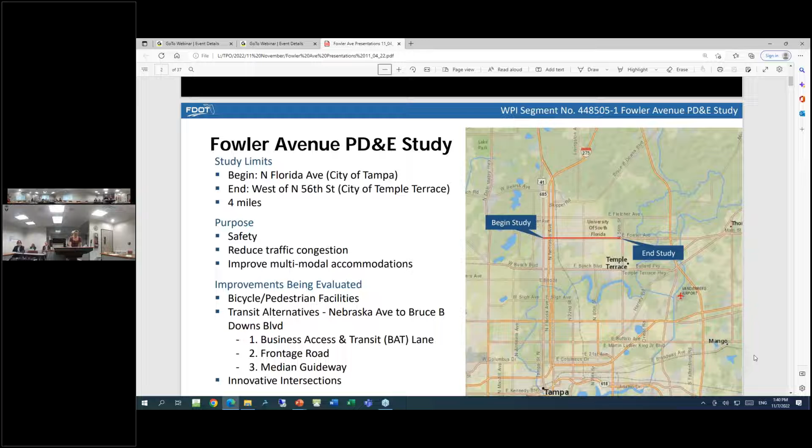All of these studies will provide the framework for improvements along Fowler Avenue. With the redevelopment of the University Mall area and the USF football stadium, we can all agree that Fowler Avenue is in need of improvements to address safety for all of its users.

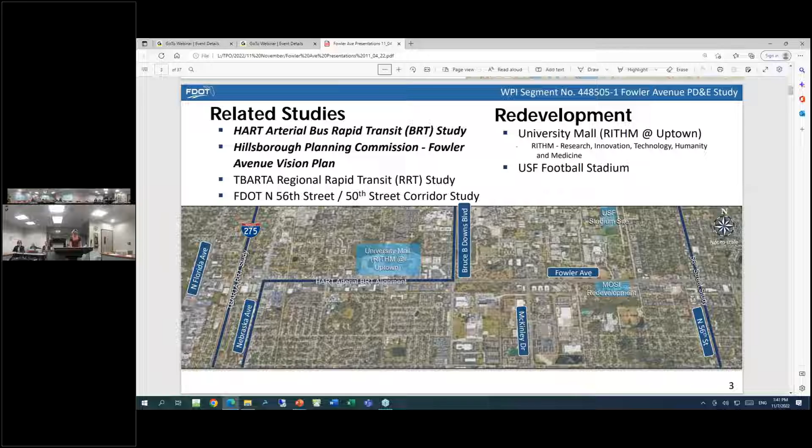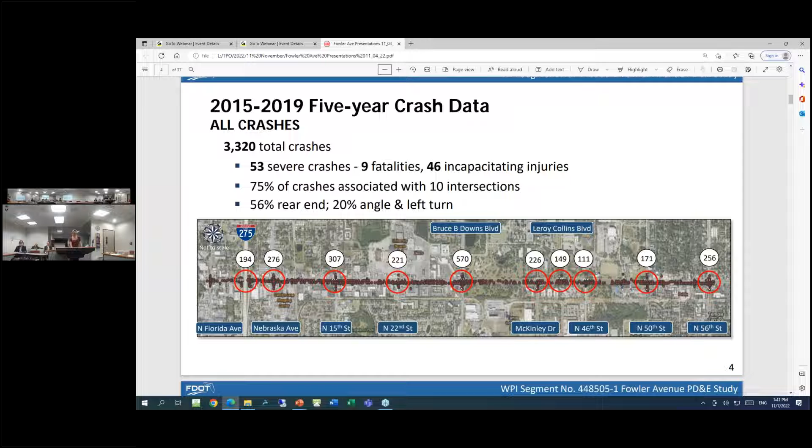I also want to mention the segment of Fowler from Nebraska Avenue to North 52nd Street is listed on the City of Tampa's high injury network.

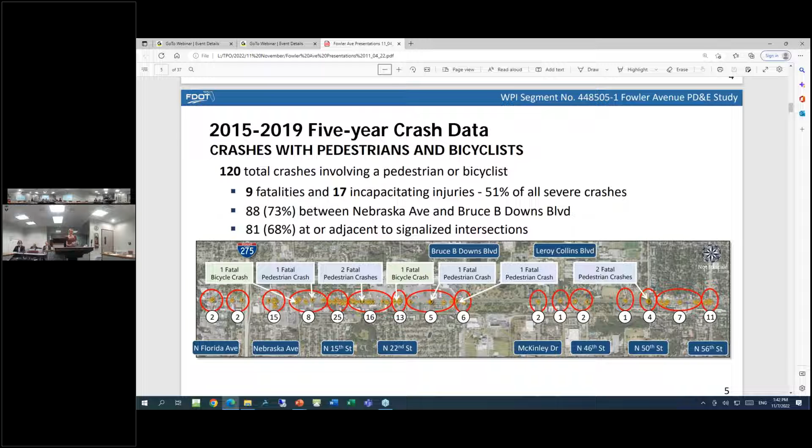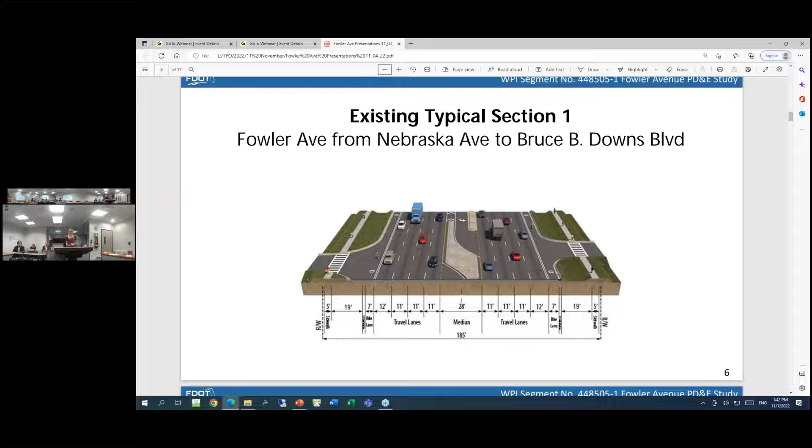Here we have our first existing typical section, which runs from Nebraska Avenue to Bruce B. Downs Boulevard. Today Fowler is a 6-lane divided roadway with numerous median left turn lanes. We have 7-foot bike lanes located adjacent to the travel lanes and sidewalks on both sides of Fowler, and the existing right-of-way width totals 185 feet.

The second typical section is in the eastern segment of the project, from Bruce B. Downs Boulevard to west of North 56th Street. This is a 6-lane divided roadway where the 7-foot bike lanes and 5-foot sidewalks continue, and the existing right-of-way width totals 230 feet.

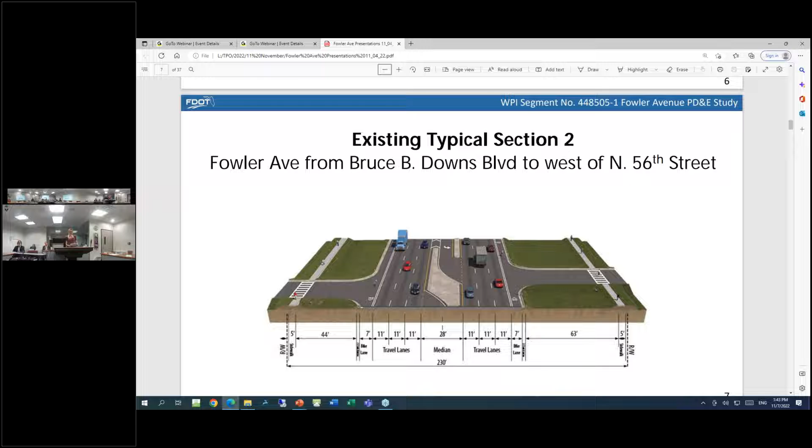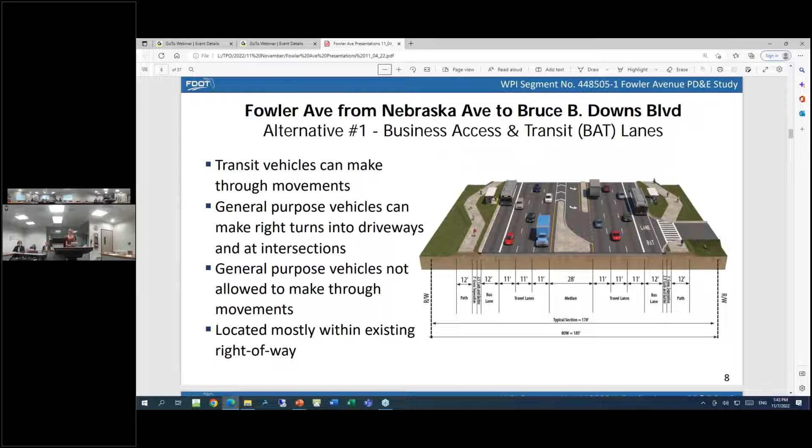Now let's look at the 3 alternatives for the transit corridor from Nebraska Avenue to Bruce B. Downs Boulevard. Alternative 1 includes repurposing the existing outside lanes as BAT lanes for business access and transit, meaning they would be marked for bus use and for vehicles making a right turn into a business or side street. This alternative also includes 12-foot shared use paths along both sides of Fowler, and based on preliminary analysis, minimal right-of-way acquisition may be required.

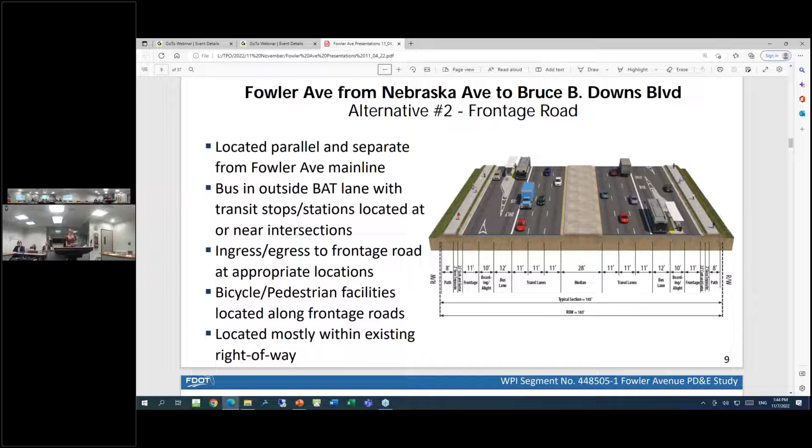The second alternative is the frontage road concept. The frontage lanes would be located parallel to and separate from the main line Fowler Avenue. They would be utilized by non-transit vehicles and provide access to local businesses. Vehicles on the main line can access the frontage lanes via slip ramps and vice versa. Transit vehicles would utilize the outside BAT lanes on the main line. Shared use paths or wider sidewalks would be located adjacent to the frontage lanes, and minimal right-of-way acquisition may be required for this one as well.

Our third and final alternative includes a median guideway for transit vehicles only. Stops would be located near intersections and crosswalks to allow for safer pedestrian access. Non-transit vehicles would be permitted to make turns at designated intersections and locations. This concept also includes shared use paths on both sides, and based on preliminary analysis, minimal right-of-way acquisition may be required.

As previously mentioned, the design of Fowler Avenue has user safety first and foremost. Narrower travel lanes and other proven traffic calming strategies are being considered. To accommodate these measures, the speed limit on Fowler Avenue may be reduced.

Also, from Bruce B. Downs Boulevard to Bull Run Drive, innovative intersections will be studied. Additionally, pedestrian and bicycle facilities will be enhanced throughout the corridor.

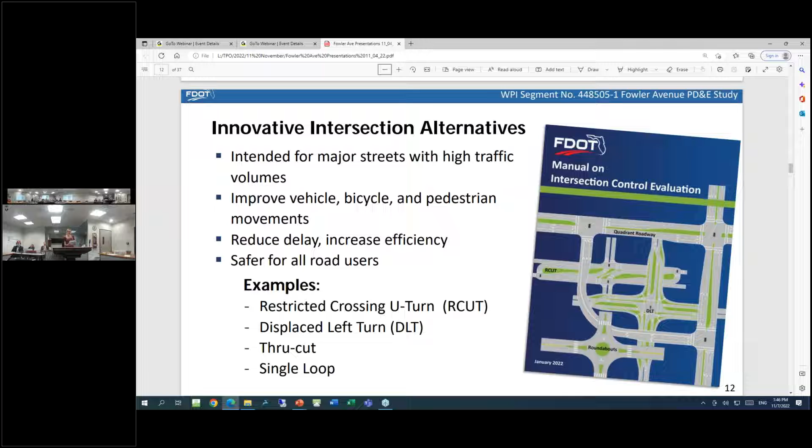Innovative intersections are intended for major streets with higher volumes of traffic, just like Fowler Avenue. They modify vehicle, pedestrian, and bicycle movements at conventional intersections to reduce delay, increase efficiency, and provide safer travel for all road users. The FDOT manual on intersection control evaluation will be utilized to determine the best possible intersection design. These include RCUTs, displaced left turns, through cuts, and single loops.

Public engagement is underway and will continue throughout the duration of the study. These study kickoff presentations will be given at the remaining TPO committee meetings and then to your board. The project kickoff newsletters in your packets were mailed to properties along the corridor and sent to stakeholders. Another newsletter will be sent to announce a future public meeting not yet scheduled.

The project website is active and will be updated continually through the study. Small group meetings will be held with interested community groups within and adjacent to the study area. Also, an alternatives public workshop will be held once the alternatives are evaluated. And a public hearing may be held if necessary based on the preferred alternative.

Here's a look at our schedule. As it shows, public involvement will occur throughout the study. Data collection is underway with alternatives development and evaluation to follow. The alternatives public workshop I mentioned before is anticipated for the second quarter of 2023. And then if necessary, a public hearing would be towards the end of next year, 2023.

For more information on the project, I put the study website on the slide, as well as my information, so feel free to contact me. And if the committee is ready, I will turn it over to Jesus for a HART study.

I have a couple. I think the project certainly has a lot of merit. I did have one question on your alternative 3. Can you bring that slide up where it shows a picture of alternative 3 with the center of transit? So that's suggesting that, are those stops in the middle? I guess my question would be, do you have any idea about how you would be moving, if there's supposed to be stops there, the pedestrians across the intersection, across the roads?

Yeah, so the stations or stops would be located preferably near intersections where there are crosswalks or at mid-block crossings. So it would be as safe as possible to get the pedestrians from the sidewalk on the main line to the median stop. Okay. All right.

I mean, without knowing a whole lot about it, I would certainly have hesitations on that. Just the idea of introducing more people crossing very busy roadways would be a very large concern, if they weren't. So that was just my opinion that I think we're bringing to it, but I was curious about that.

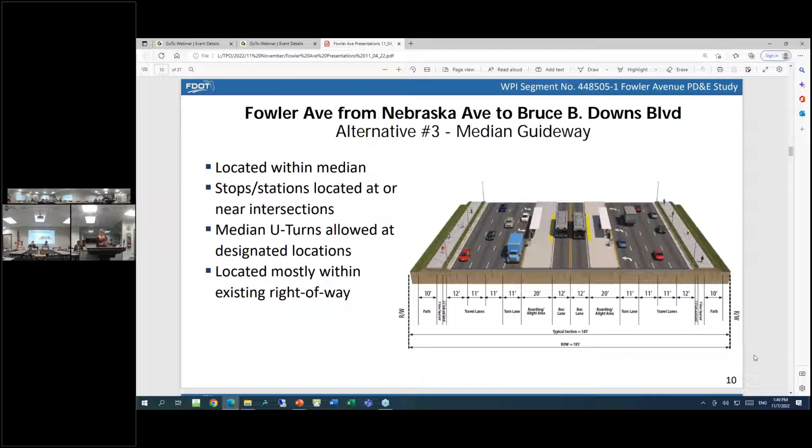The other thing, and this is just more of a comment, if you can bring back the slides that show the crashes on the intersections. Again, I don't regularly work with traffic. That's not what I do. So maybe this is very common for you all.

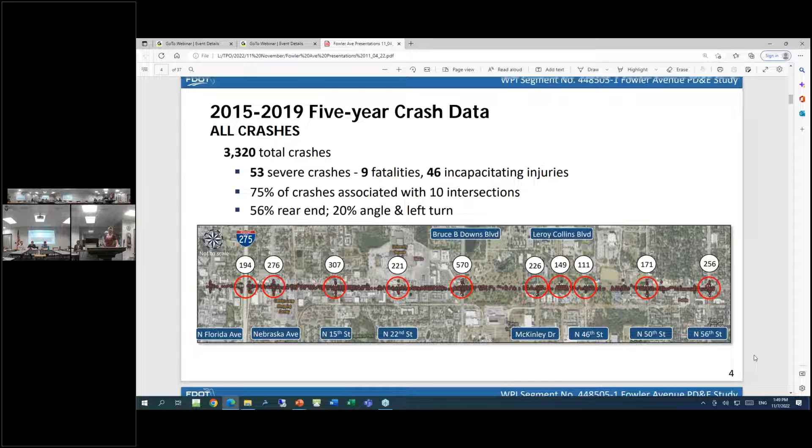But what jumped out at me is the number of crashes at 15th and Fowler for its size. I think that's a 2-lane road that may expand to 4 at the intersection. But this one and the following one with the fatalities or the pedestrian, it seems excessively high compared to all the other ones. So I guess one thing I'm just pointing it out for whatever everybody's benefit that they wanted to hear about it. But I guess when you talk about innovative intersections and so forth, I would minimally like to think that this was a really focused intersection based on the data. I'm sure it would have been, but I think I'm just kind of highlighting it.

Certainly, there's other ones of concern too. I mean, I'm not surprised Bruce B. Downs and Fowler is a large peak, but 15th, I just wouldn't have thought that. I think it's the amount of pedestrians that utilize that area is probably the reason. But so anyway, just bringing that up. If anybody had comments, feel free. But that was it for me.

One follow-up to the issue on 15th. That was in our original high injury network, Vision Zero.

It has a HART route on it that is one of the highest ADA used HART routes in the county, and I know the county has also just done some improvements on 15th.

Okay, very good. I'm glad to hear that's being addressed. That's part of what we're charged with here as a committee, to identify things and ask questions, and I'm glad to hear they're taking some measures. But as you look at future studies, I think that should be a focus area.

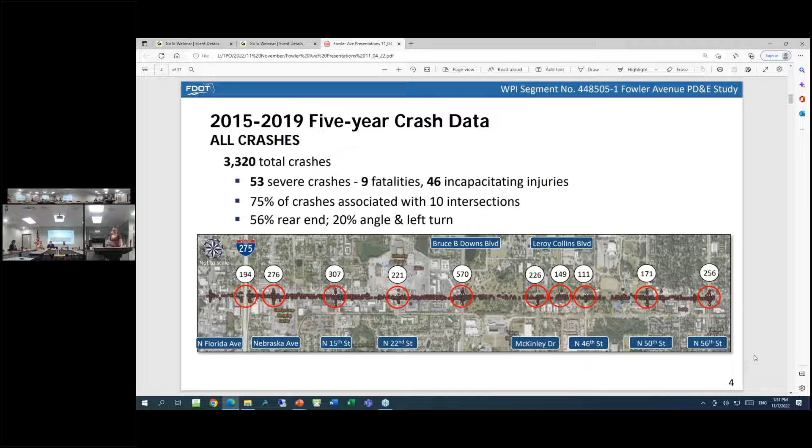Thank you. I don't feel like we have any other comments. Oh, I'm sorry, Sarah. Just looking more closely at the typicals, one thing that stood out to me in alternative 2 is you only have an 8-foot path, and that seems kind of narrow since that's going to be replacing the bike lane and the sidewalk. Just something to keep in mind.

Yes, I understand. These typical sections are very preliminary. We just executed the contract with the consultant, so we're going to be refining these. The reason there's 8-foot paths on our side right now is we were trying to see what we could do within the existing right of way. We're going to be working on that. Thank you.

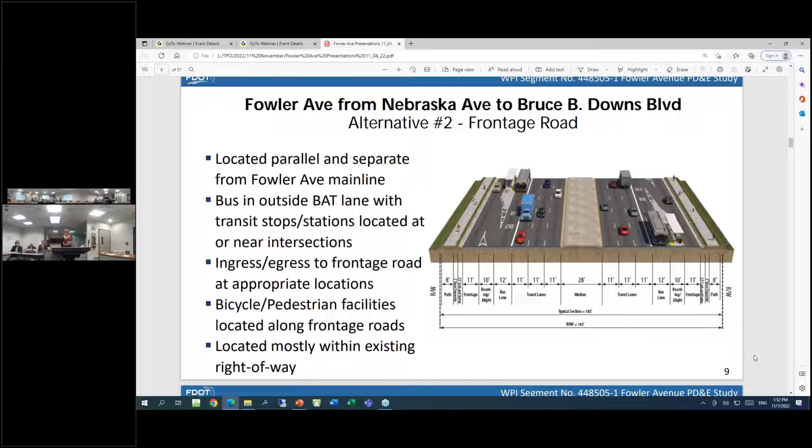Good afternoon, committee members and everybody else. My name is Jesus Barraza Garcia. I'm part of the planning staff with HART, and I'm here to give you an update on the arterial BRT study.

First, how did we get here and what has happened to date? The study started in the 2018-2019 timeframe as phase 1, and it resulted in a recommended alignment that was approved by the board in late 2020. In parallel, there's been the TOD pilot project going on, which is intended to recommend transit-oriented development strategies along the BRT corridor. That study is slated to wrap up sometime before the end of this year.

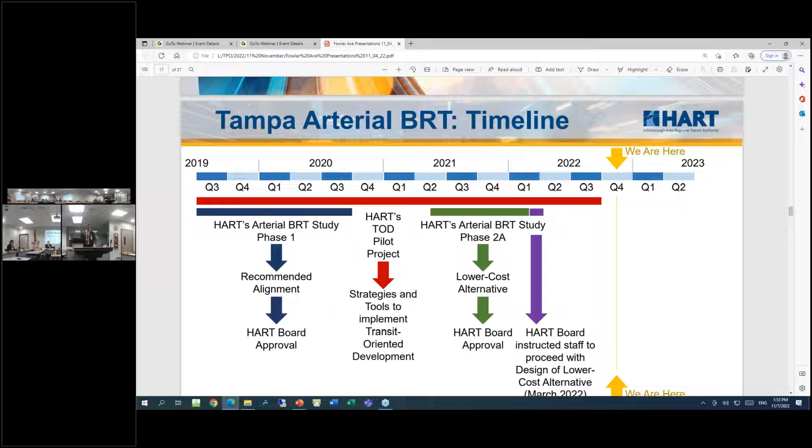After coming up with the recommended alternative, there were concerns about the high cost and the uncertainty of the transportation surtax. So phase 2A came to happen, and came up with a lower cost alternative, which was approved by the board earlier this year and moved on to design. I'm going to talk a bit more about the lower cost and recommended alternatives in a little bit. They mostly relate to how the bus interacts with traffic, but the alignment itself hasn't changed between one alternative and the other.

So this is an overview of the corridor. It's the Florida-Nebraska-Fowler corridor connecting downtown Tampa with the university area. HART's 3 busiest routes connect these 2 points, and 2 of those routes are the Florida and the Nebraska routes. So this is a prime corridor for BRT service.

It would also connect not just downtown and USF, but also Tampa Heights and Seminole Heights, which are important neighborhoods with lots of residents and jobs along there. The recommended alignment from phase 1 is the Linebaugh Avenue crossover to get from Florida to Nebraska up to Fowler.

If you get over too soon, you will be replicating the Nebraska route, which is already a Metro Rapid with some BRT-like enhancements, so we don't want to be duplicative of that. Also that way we serve most of the densest parts of Florida Avenue and avoid the car dealerships north of Linebaugh. Last I checked, cars don't take transit.

What does this look like for Fowler? So that's a close-up of Fowler. Station areas are subject to further studies, but preliminary stations would be at 15th Street, 22nd Street, and Bruce B. Downs. There's also a station at Nebraska and Fowler, but that will more than likely be on Nebraska, south of Fowler.

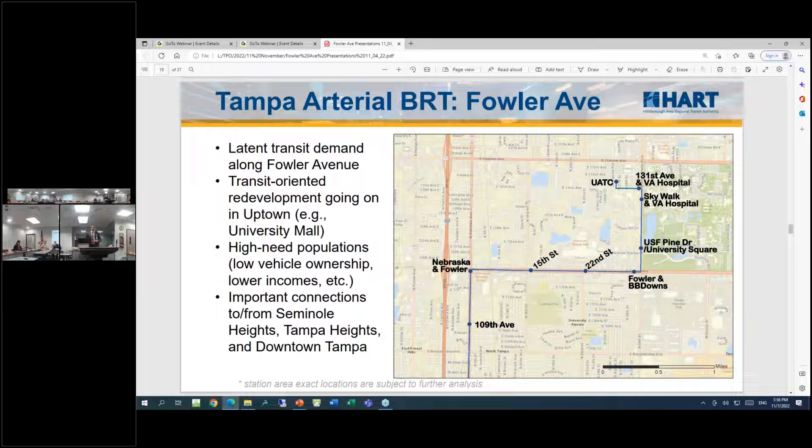There's also redevelopment going on in this portion of Fowler, the most notorious of which is University Mall. I understand there are others going on, but it's still in the works. At the street level is where you get to see the difference between the preferred or recommended alternative and the lower cost one.

First, I will caveat this by saying that this is the outcome of the BRT study. FDOT's PD&E will look further into this and refine the details of these alternatives and the other ones that Nam represented.

So you can see that preferred is the median running bus-only lanes, and the lower cost one is curbside running business access and transit lanes, so buses and cars would mix there. There's about a $40 million gap in terms of capital cost. Operating cost is pretty similar, slightly higher on the lower cost alternative because it takes longer since it has less preferential treatment for the bus. The longer the bus is running, the more labor, the more fuel you have to pay.

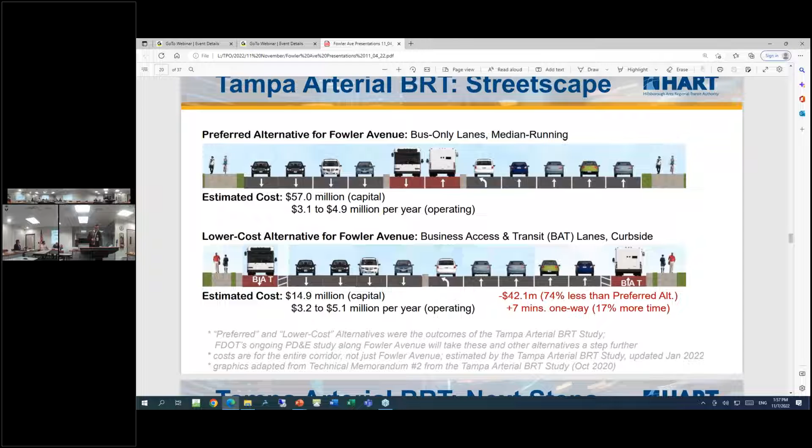So what's next for the arterial BRT study? We must complete the design, and then after that's done, we would move on to permitting, public engagement, and seeking funding matches from federal, state, and regional sources. And then construction would happen. There's no defined implementation timeframe because funding has not been identified for the entirety of the corridor. There are some pieces here and there - there's the PD&E going on Fowler, there's another study going on in the southern part of the corridor, the Tampa Heights area. But there's no funding to build the whole thing and to operate it at a higher frequency than today.

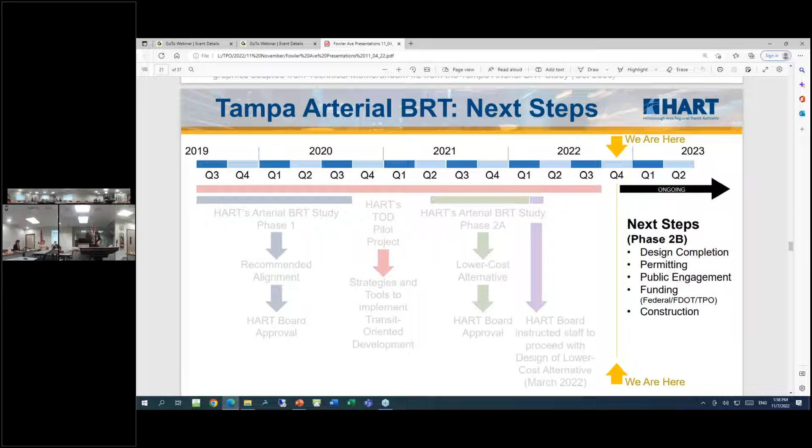Yeah, I think maybe, again, probably easier if we address questions while it's fresh in our minds here. So thank you for the presentation. Do we have any comments or questions from the committee?

Mike asked: the funding you mentioned, is that dependent on the referendum or is that independent funding? Yes, it depends on the referendum. I guess, is there a backup plan if it, for whatever reason, is not approved or passed? Or just we won't be able to do the project right now? Well, it wouldn't have as much preferential treatment as it would ideally have. We already have good service on Florida and Nebraska, but this would speed it up and make it more attractive for users. Okay, thank you.

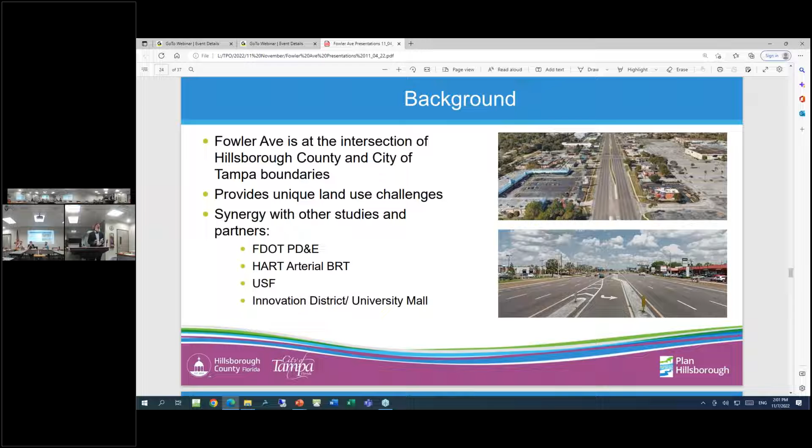So again, what is the purpose of the study? To develop a vision plan for Fowler Avenue corridor that enables equitable redevelopment. We'll talk a little bit about that. Equity is not just a catchphrase in this—it's something that has to be driven home in what we do here.

But what is a vision plan? If we go around the room right now and have a conversation about what is the vision for your family, everybody's going to come at it a little bit differently, but you're all going to have similar ideas of what you want. That's the same thing about having a vision plan for a community. It's asking them what they see for their community and how their families can be successful in that community, whether it's their economics, their education, allowing children access to play, or allowing the elderly and disabled access to goods and services they may not see today.

And achieve an integrated land use and transportation vision. The land use we talked a little bit about, and that sets it up with the transportation. But part of what we're looking for here as an actual deliverable on the scope are some policies that would be adopted into both of the comprehensive plans for the city of Tampa and unincorporated Hillsborough County, that deal with how we tackle those two different land uses and development patterns in the county and the city along Fowler Avenue.

And then develop a clear and consistent redevelopment strategy. So basically, my three deliverables are: one, the bread and butter—what are the existing conditions on the road today, land use wise? Two, what is my vision plan—what do we all see happening in this area, policy wise, in the future, and how can we articulate that in a vision? And then three, what are my redevelopment strategies to actually see those visions become a reality?

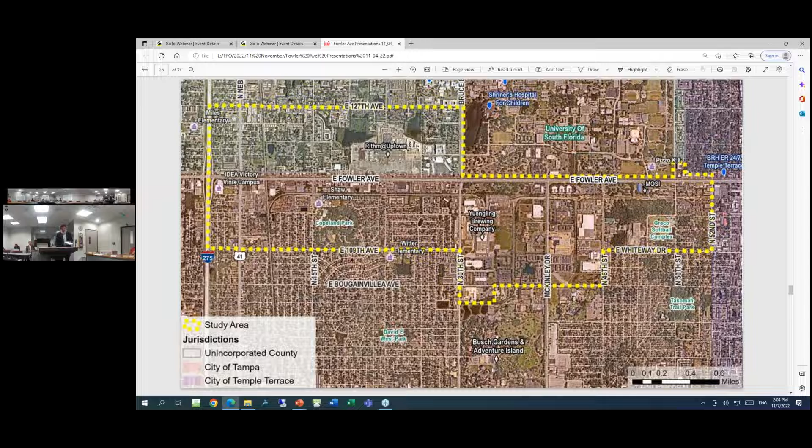So a little bit about those demographics: just over 15,000 people, 6,000 households, 25% don't have a vehicle. Again, there's a lot of employment here, but there's a lot of people without vehicles—that's what they always talk to me about as a land use planner. One of the things we always go after to actually improve transit along anything is, can we demonstrate to the Federal Transit Administration that the infrastructure, the investment that's about to be put in this area, is necessary and deems appropriate. So that's another one of those conversations right there.

But the employment and the population is an interesting thing. We talk about how many employees to how many people—well, the county basically has about 50 employees to every 100 people. In this area, we've got about 75 employees to every 100 people here. If I go south of the Alafia River, way down in South County, that's only 20 employees to every 100 people. If I go to Wimauma, you're dipping all the way down to 13. So you can see there's a concentration of employment here, but with that concentration of employment, we don't see benefits actually occurring to the people who live there.

You can see that household's at about 30,000, where you can see what's going on in the metro area, in the county, or in the city. So that does take back into issues about equity, making sure that folks in this area have equal access to reach places of employment. If 25% of people don't have access to a car, does that dip into issues of ADA, where they don't have access to make it to places of employment along Fowler Avenue because maybe the sidewalk stops, and we don't have a way for them to get to certain areas? There are other issues we can capture in a vision on educational attainment and other things, but it's not specifically the place of this plan to account for those issues, though it's something we want to capture from the community through education and training.

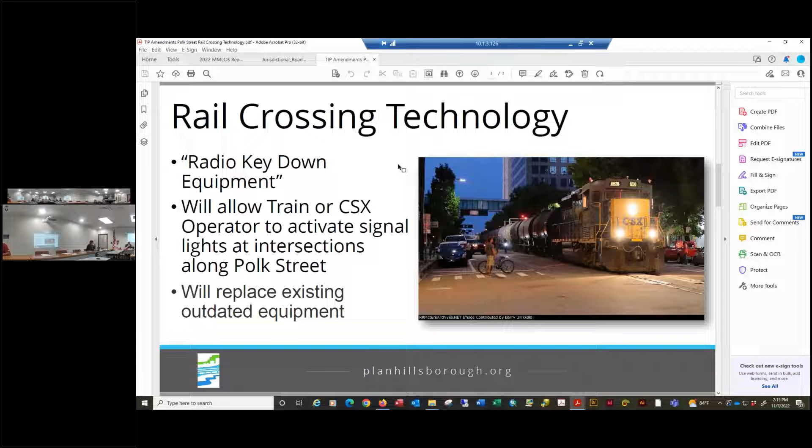And as part of the newly adopted public participation plan amendment, we posted an issue of the newsletter release on social media. We published a web page and posted signs along Polk Street intersections along the rail corridor. And that is all I have, quick and sweet.

And we're recommending the amendment to the fiscal year 23-27 TIP and recommending approval to the TPO board. Any questions for you guys?

Okay, thanks, Roger. Do we have any questions from the committee? I have one, just because I'm not that familiar with this. I'm familiar with this rail crossing, but I don't know how much rail car traffic it gets, and I don't recall what the current layout is as far as lights or barriers. Is this going to be just an addition of lighting, or is there also going to be pedestrian stops that come down, or what exactly is the radio key down?

Okay, so the radio key down—when a train approaches a rail crossing intersection, the older equipment will trigger the arms to come down and the flashing lights to signal. Along Polk Street, there are no crossing arms that come down. When the train moves through that corridor, it has to be at a specific speed, and it will trigger the flashing signals. Apparently some of the signals are not flashing, so this new technology will replace those.

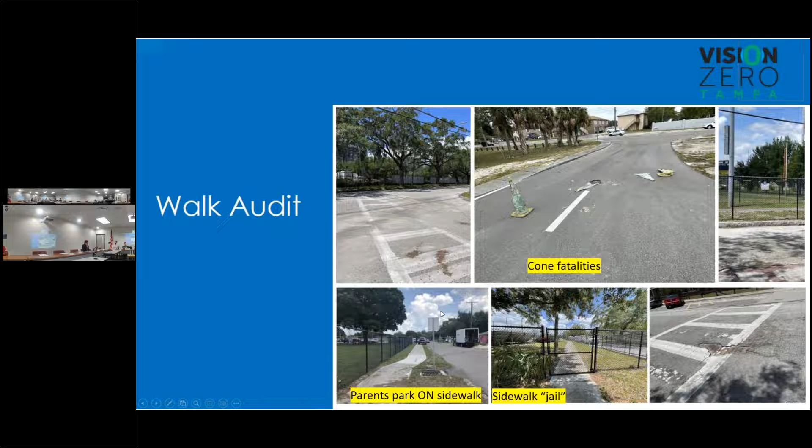That's one thing. I call this one sidewalk jail - it's over near Blake. Getting from Stewart over to Blake, you would have to go actually into the street at certain times of the day, so that seems like a missed opportunity. And then there are misbehaving parents who just say, 'I'm not going to deal with the car line or follow processes, I'm just going to park on the sidewalk.' Clearly that is a problem.

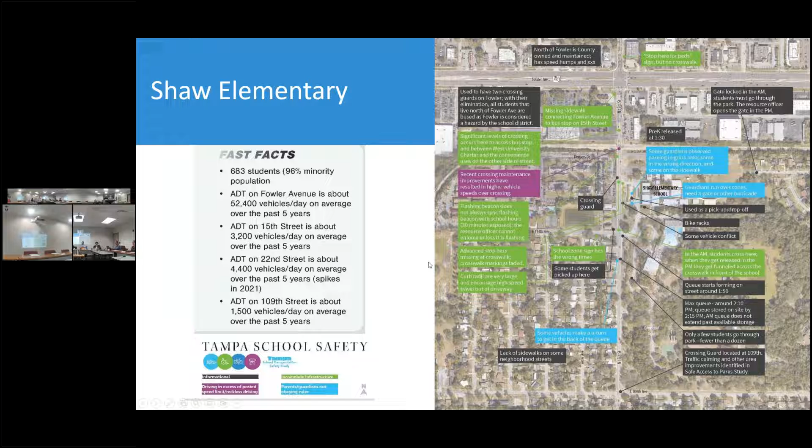We have our field analysis in each portion of the report, so each has a field review. We took all the individual survey responses for each school, then we got draft ideas and met and had a little charrette with each principal of the schools. We said, here's our professional and survey-informed ideas - you work with the school all the time. So we had a lot of really great interaction, and you can see the little Post-its and marking up the maps right in their offices.

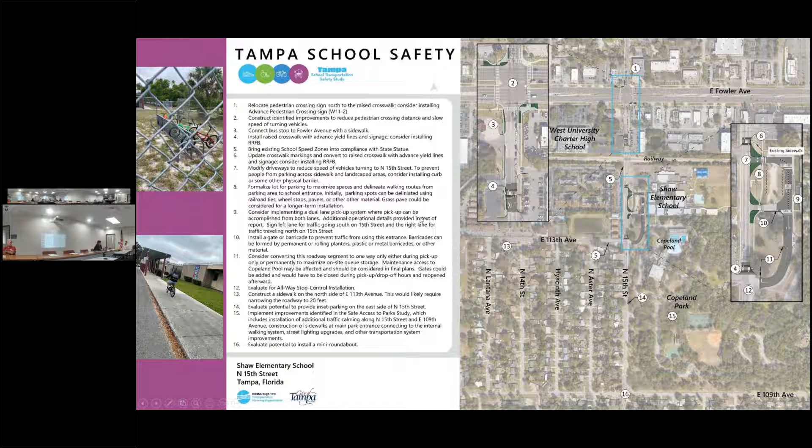We did those - I'm not going to go into all the recommendations this time around, but we developed formal recommendations and illustrated them for each map. These are again going to be posted on the website for your action in December. Orange Grove, same process.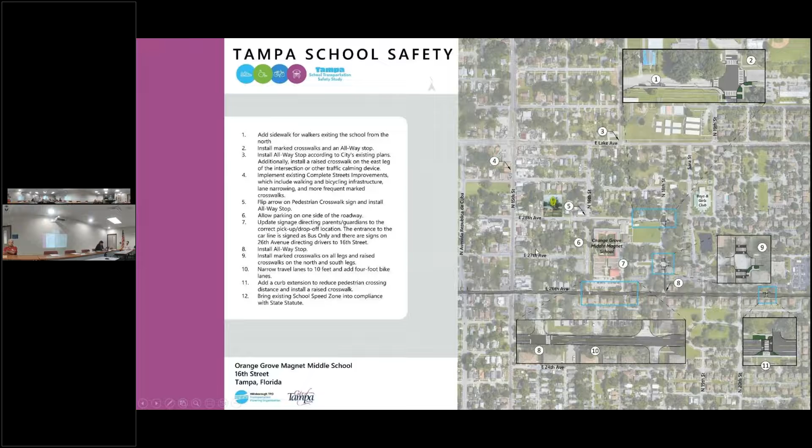Then West Tampa - this one's kind of fun because they've been informally doing what is called a school street. We know from our Vision Zero efforts about open streets or ciclovias. Well, there's a concept to do that where you close streets in and around schools to use for safe circulation for non-vehicles, and this school is doing that. So City of Tampa is going to work with us to make that a formal process and policy.

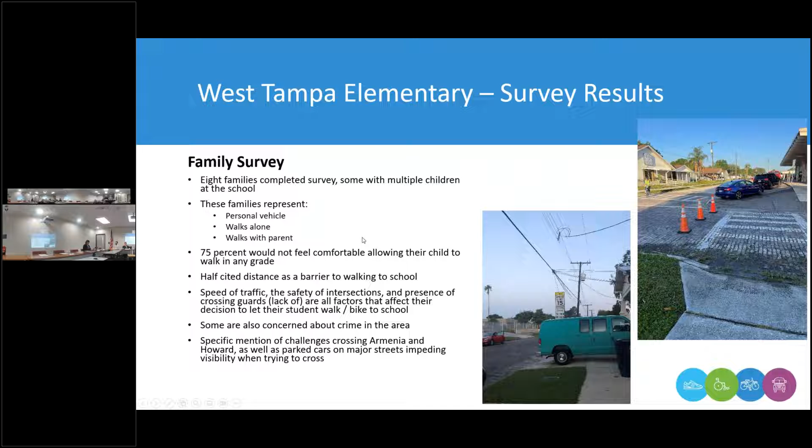Also, you see the cones. Having an official maintenance of traffic plan with the cone package and barricades, and where there are school streets or not school streets, is one tool we're going to file with each of the schools after the recommendations get formalized.

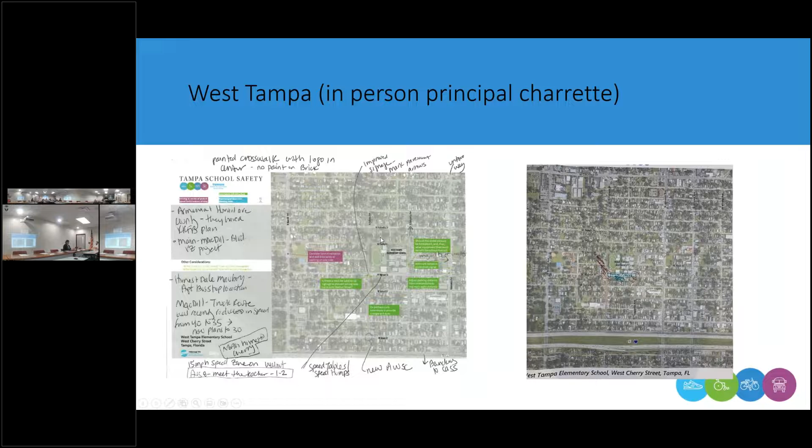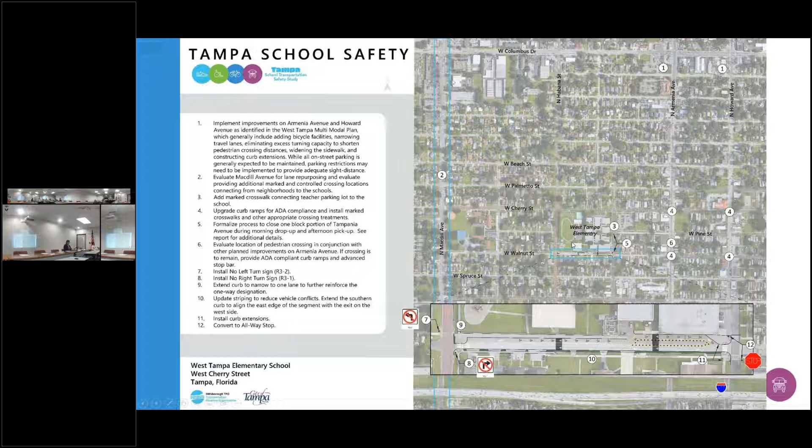Here's the observations and the principal feedback. The principal was very receptive to having a painted corridor, because there's some one-way and crazy driving on the one-ways where local residents are going the wrong way, and there's some speeding through the school zone because it's got extra pavement. So we're going to propose a Paint Saves Lives project for that lane, to make it more obvious where there's a special drop-off area. I'll tell you a little more about that fun project.

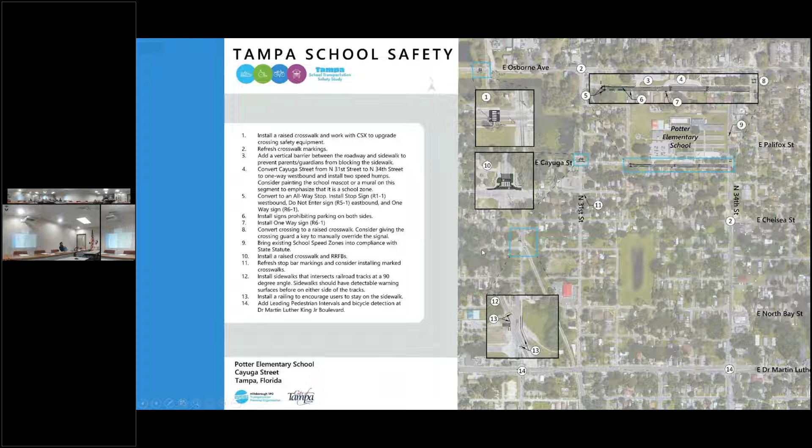And then at Potter, we got the family surveys, the principal recommendations, and then the formal recommendations like raised crosswalks, four-way stops, and additional speed management techniques.

Jefferson High School in the West Shore area - we've balanced these recommendations with city projects that are coming. We did that for each of the schools. Some of them are lucky enough to have complete street projects proposed in and around them, like Lois.

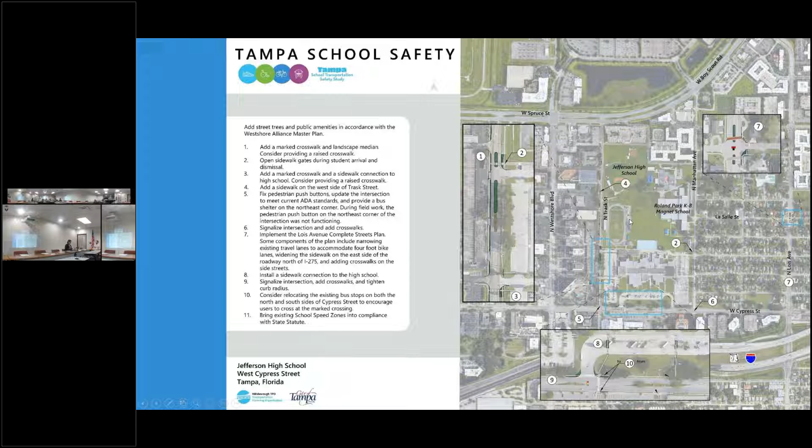Cypress is getting some attention. We're suggesting a traffic signal because the buses have a horrific time getting in and out on Cypress each day. So then we had this whole campus of Just Elementary, Stewart Middle Magnet, and then just down and under the underpass is Blake High School.

This was looked at comprehensively because they all influence each other and some of them get out at different times. This is where a school policy would also help us with all of our circulation issues, because Stewart is a magnet school.

We believe with all this redevelopment south of it, it could be a candidate for flipping back to a conventional neighborhood school, because you probably have a lot of children moving into all this residential that's going in, and that would not have this be attracting buses. Magnet schools are pretty much very bus focused.

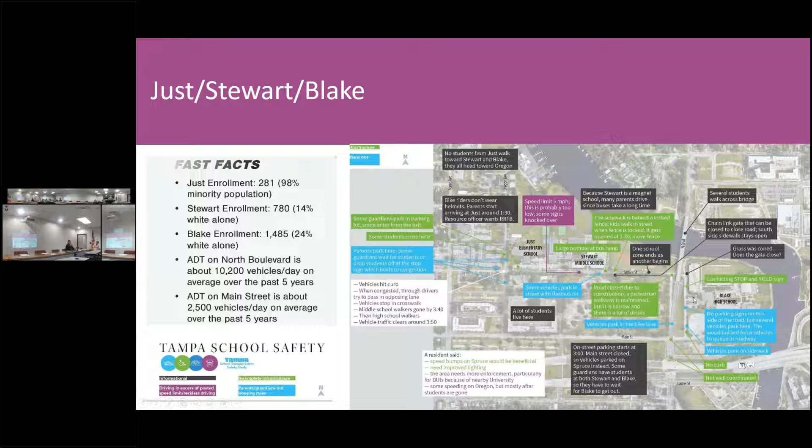We had all kinds of bizarre behavior in and around Blake High School, but the principal said, hey, we'll work with you on getting some of your encouragement and education policies out there. We have a drama department that will help make videos, etc. So yeah, and here we are.

Okay, and then the last fun portion of our study is encouraging and educational ideas. We have a list of resources, because there are some really great products out there. There are some great groups like Sidewalk Stompers that are doing very effective walk-to-school programs and safety ambassador programs. So they were a stakeholder and we're using their ideas and leveraging those.

So we're listing all these great resources that we have access to, so that they're like little flyers or magnets on their file cabinets in the schools, so that the administration feels comfortable about how to get things resolved for their school sites, on and off property.

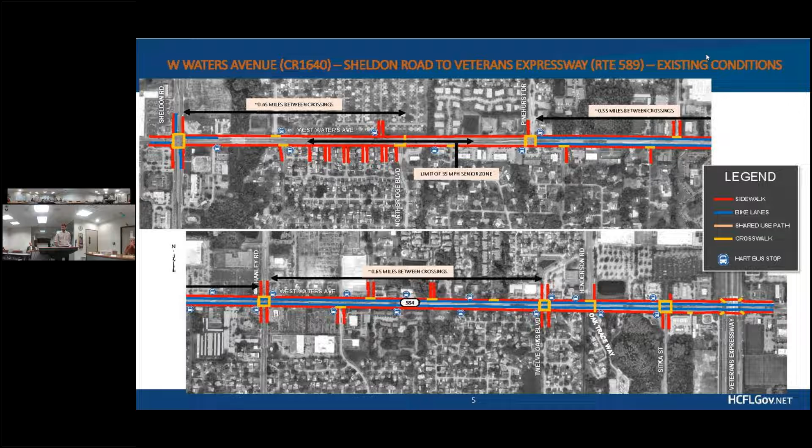This is just a commentary on the existing conditions. It is 35 miles per hour on the western end, 45 on the eastern end. And again, no mid-block crossings, numerous commercial driveways, and 2 HART bus routes on this segment.

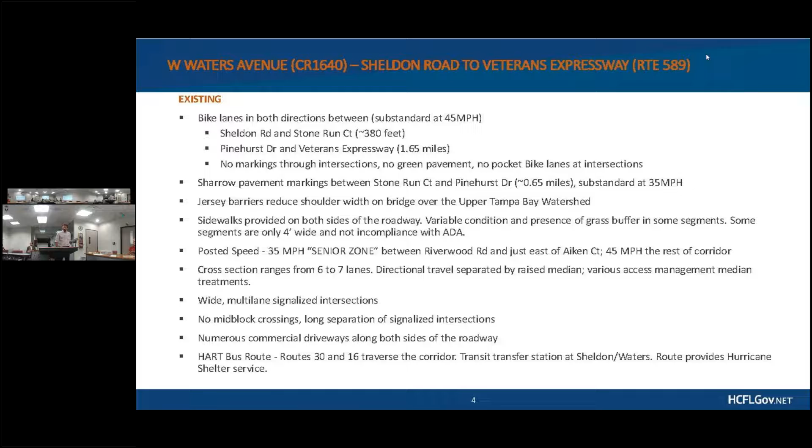So the potential improvements - we did try to use the county's tiered levels of interventions. Tier 1 is the lowest cost and quickest installation, while tier 3 is the highest cost, if I'm reading that correctly.

So a number of proposed or potential improvements that we will then go back and analyze and make sure that these would line up with the corridor.

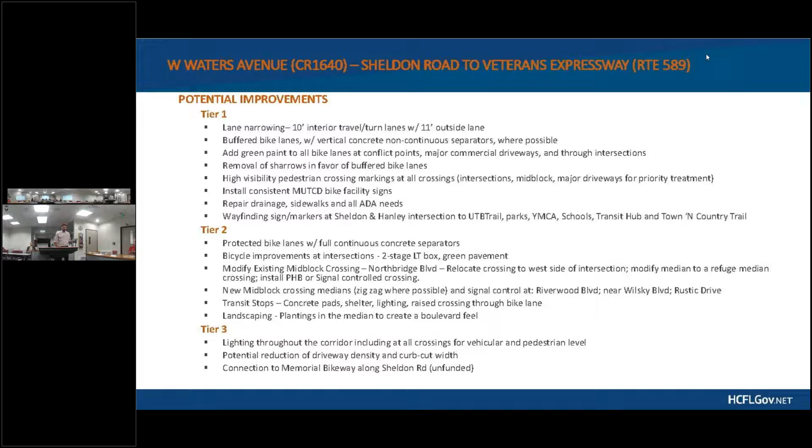Some of those potential improvements shown on the segments here include bike lanes potentially throughout the corridor, trying to extend those to Sheldon, intersection treatments such as bike boxes, signage, green paint marking at conflict points, and then mid-block crossing treatments at the locations proposed, which are Northbridge Boulevard and 2 other locations on that segment.

And showing these existing crosswalks parallel to marking the existing crosswalks and some other paint interventions, as well as some additional connectivity proposed for connecting sidewalks.

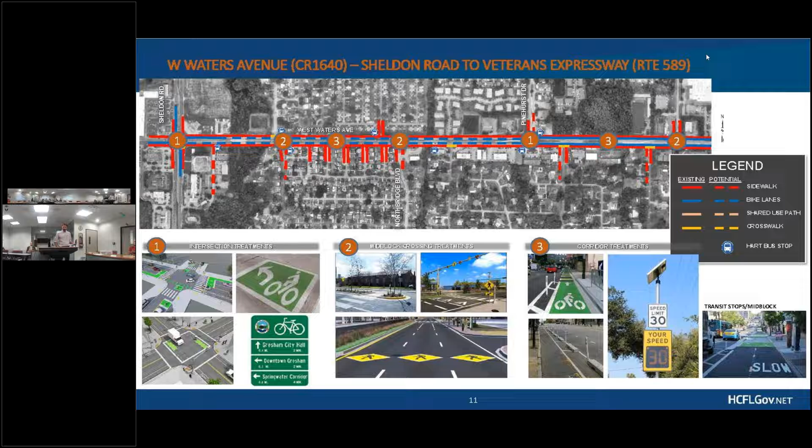Just continuing on with that corridor, you can again see the proposed improvements - a mid-block crossing at Rustic Boulevard and several intersection treatments, as well as crosswalk and paint treatments.

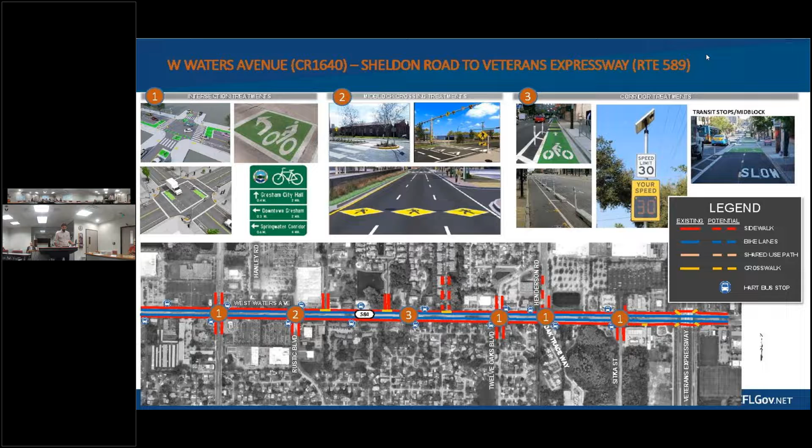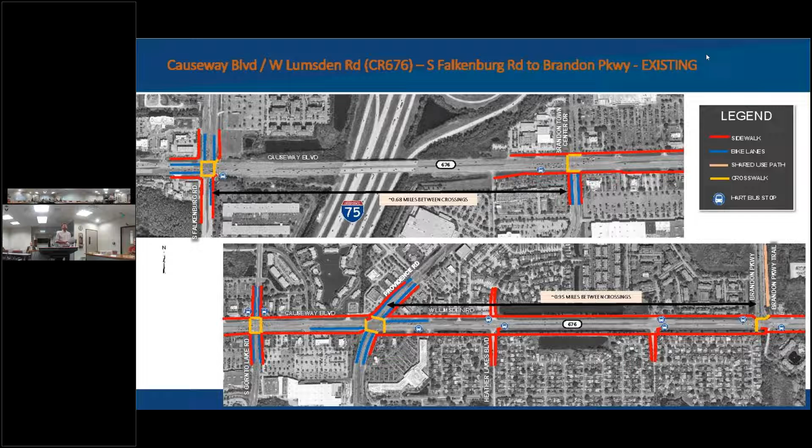Again, I spoke about the tier 1 through tier 3 improvements, and we even have a couple of adjacent and supplemental projects. There are some proposals for on Falkenburg, Providence, and Gornto Lakes Road, converting bike lanes to buffer protected bike lanes, and identifying additional speed management and traffic calming treatments throughout the corridor to facilitate a target speed of 35 miles per hour.

But some of the tier 2 improvements I want to focus on here are new mid-block crossings, reconstructed sidewalks, a shared use path on the I-75 overpass with Jersey barrier separations in that location, and bicycle improvements such as a 2-stage left turn box, green pavement markings, and installing a counter on the Brandon Parkway Trail as it terminates there.

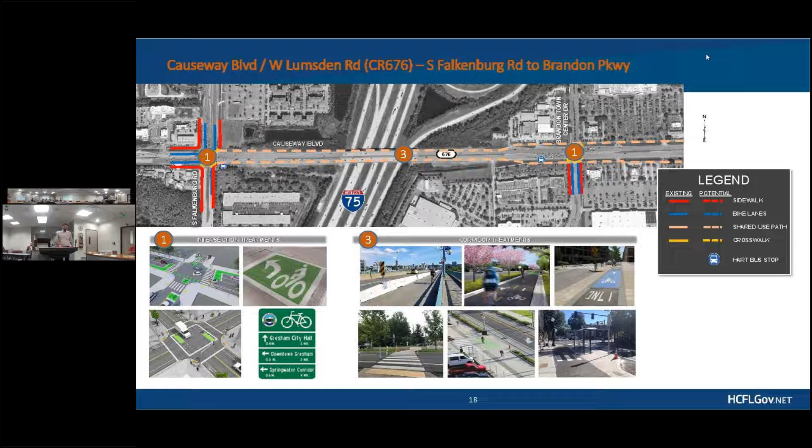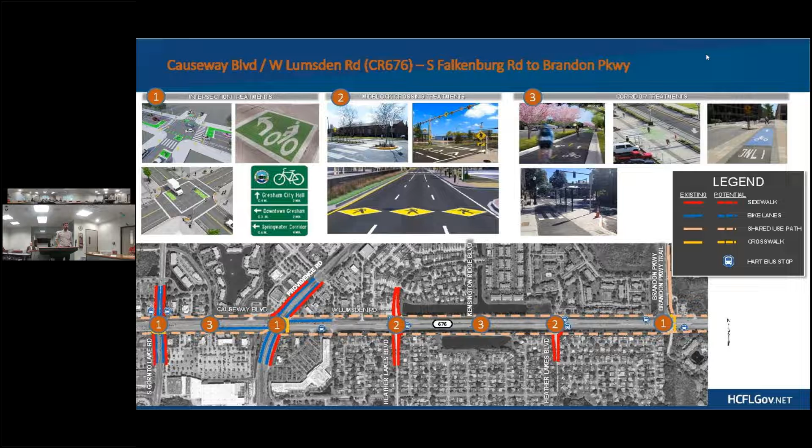Again, just some of those improvements shown on the map here. You can see the proposed shared use path crossing I-75 on Causeway Boulevard as one of the main ones. Continuing along, you can see how that connectivity goes over to Brandon Parkway Trail and Providence Road, where there

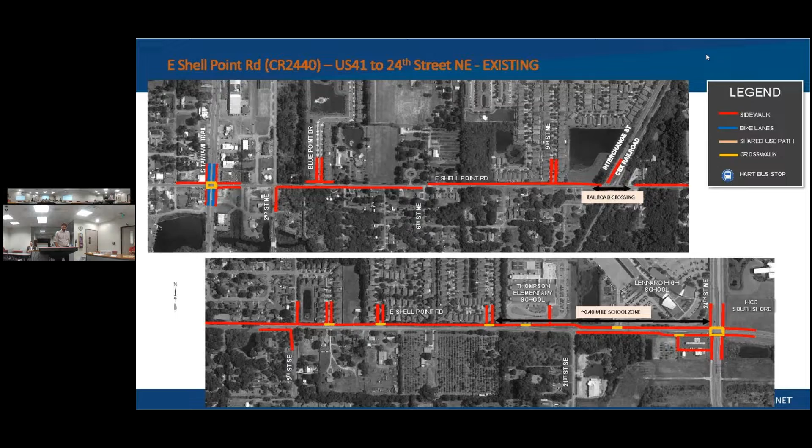There is also a vision for a shared use path on a portion of this in the Greenways and Trails plan. One of the tier 3 improvements shown here is continuing the 10 to 12 foot shared use path along the north side of East Shell Point Road to US 41. That is where certain segments of shared use path exist today.

Just showing that on here, you can see the sidewalk gaps filled in on the south side and a proposal for a shared use path along the north side of Shell Point Road.

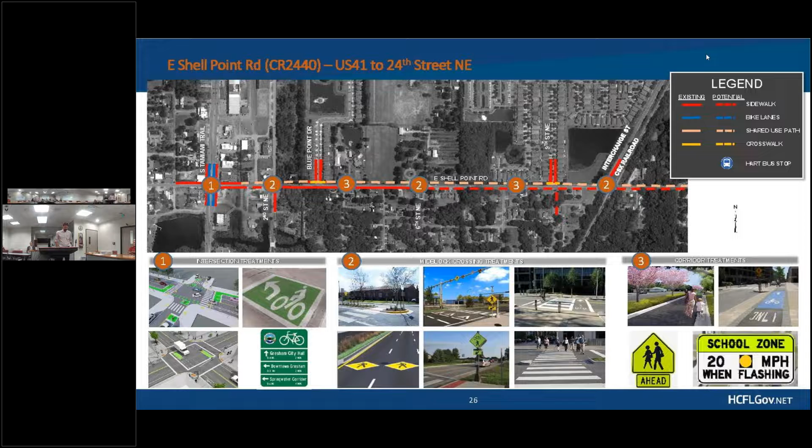Moving over to 24th Street, again, the same treatments proposed, as well as mid-block or new or enhanced crossings. I should point out that the HCC South Shore campus is where the South Coast Greenway connects to Shell Point Road, so making that connection with the shared use path would be a goal of this project.

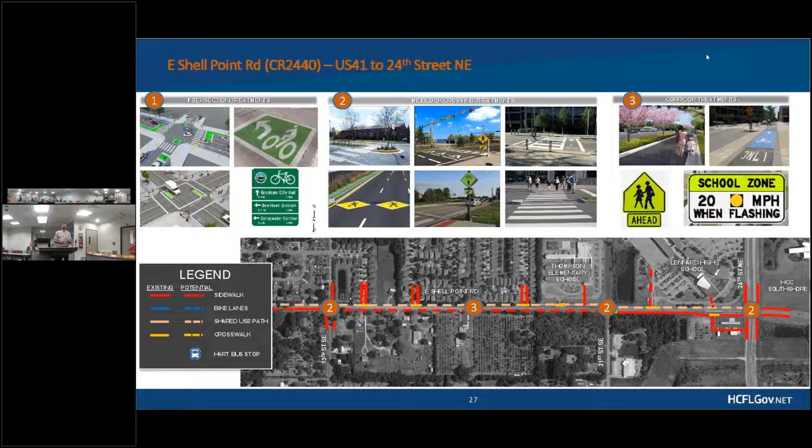So, again going back to the tier 1, tier 2, and tier 3 improvements, we have proposals for high visibility pedestrian crossing markings, extending the school zone to include 200 feet from school grounds and all new crossings at the school locations, repairing the sidewalks, and realigning Tucker Road to meet Balm Riverview at a 90-degree approach, which will reduce the crossing distance among other site improvements at that location.

We also have some proposals for mid-block crossings, bicycle improvements at the intersections, including bike boxes, green conflict paint, and wayfinding signage, and then connections to the existing bike lanes on Boyette, McMullen, and Symmes Road.

One of the things about the plantings here, one of the proposals about that is it is a traffic calming thing. In addition to narrowing lanes, planting vertical trees alongside roadways provides a visual cue for people to slow down because you can naturally feel that sort of closed-in nature of it, and it does tend to slow traffic down.

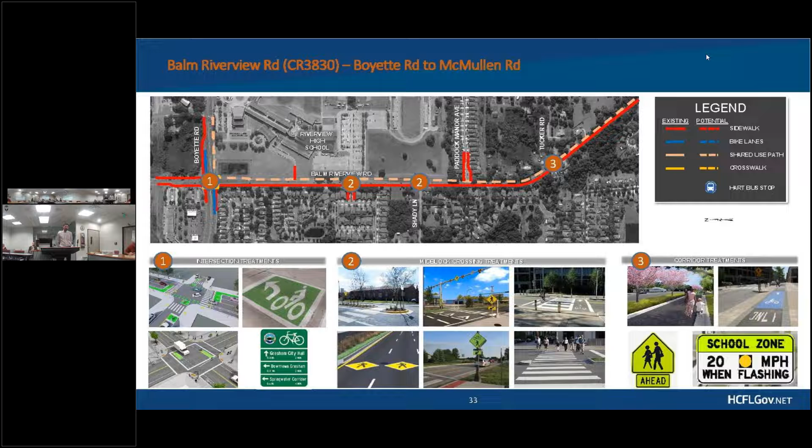Continuing that treatment all the way down to the connections at McMullen Road, and then proposing bike lanes as you get past McMullen Road.

So, the next steps: again, we do have the safety retrofit toolbox here, but we are going to evaluate the potential improvements, the bike facilities enhancement, or whether it's a complete retrofit, looking at each of those intersections and crossings, and we will probably be coming back in February for action on this item. So I am happy to answer any questions that you may have.

All right, very good. Thank you, Wade. Do we have any comments or questions from the committee? It was very thorough, good stuff.

I know I've said it before, and I like the idea of the plantings from the environmental side. Unfortunately, there's a maintenance aspect to having trees, but the positive aspects from helping to deal with emissions, and even maybe possibly shade for cyclists or pedestrians in the area, is a nice thing. So maybe not something that would be for an entire length of a project, but maybe in a focal area, because I do think amateurishly that it does create kind of a focal area, that this is my road in this area here, and it's separate from those outside facilities for the bicycles. So I think there is some merit to that. Yeah, it does cost more public dollars, but also there's a return on those dollars because there are studies that show adjacent property that has plantings in the right of way actually has a higher return value.

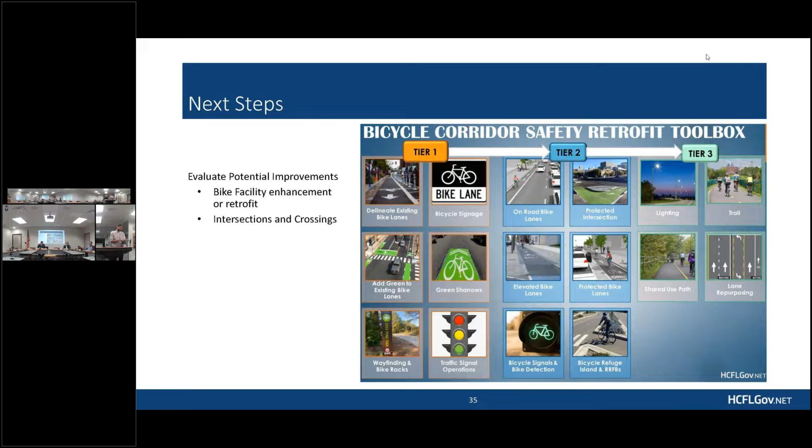Y'all don't have a larger map that shows all of that tier 1, 2, and 3 and how it connects into the existing system? No, we don't have an overall map at this time, but that's a good idea. It helps to visualize why certain improvements would be made at certain tracts, because you're making connections to the larger networks. We do show some existing connections - at Boyette Road we show the bike lanes and sidewalks, but we don't show that those continue further to give an overall picture. So that's a good suggestion.

Thank you. Did you make a comment about Brandon Parkway, that maybe you were surprised at how much use it was getting? Yes, I believe you all did some of the counts, possibly Sarah. When we did the big data trail survey we brought to you last month, we've been doing some analysis of it. One of the ones that has stood out to us in particular has been Brandon Parkway. We're still finalizing some things and identifying follow-up steps to confirm it, because we don't have actual counts - there's some kind of algorithm the vendor does on their end, so it's not an exact count. But based on that and what we're seeing, it's a very highly used path.

I think that's a testament to how it's designed. I hear about all these studies, and I don't think I'm integrated into all this the way you guys are, but I've driven that path and seen it in use. I think the combination of the size, where you have ample space, and there's a lot of growth and separation - it's just the nature that was put there. It's more inviting, especially compared to the really heavy Lumsden area. You feel a little bit safer too. When you add all this together, I think that's a function of design that went all the way back to before they put it in. That's just my opinion, but I don't know if you want the feedback or not.

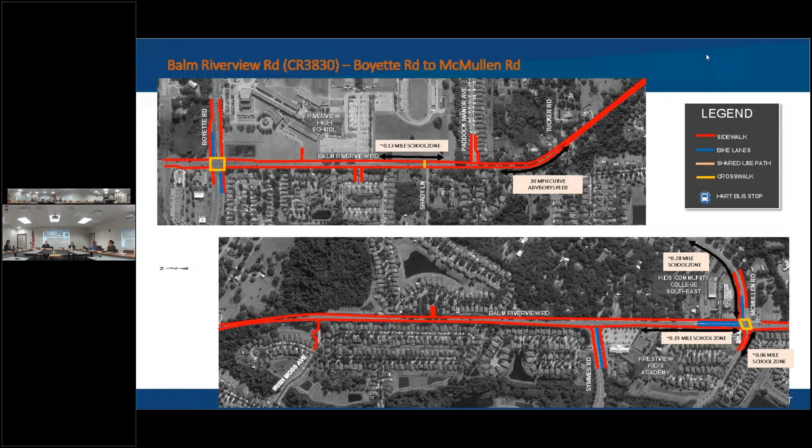But anyway, great overview. We look forward to hearing future updates. Okay, that concludes all the scheduled items.